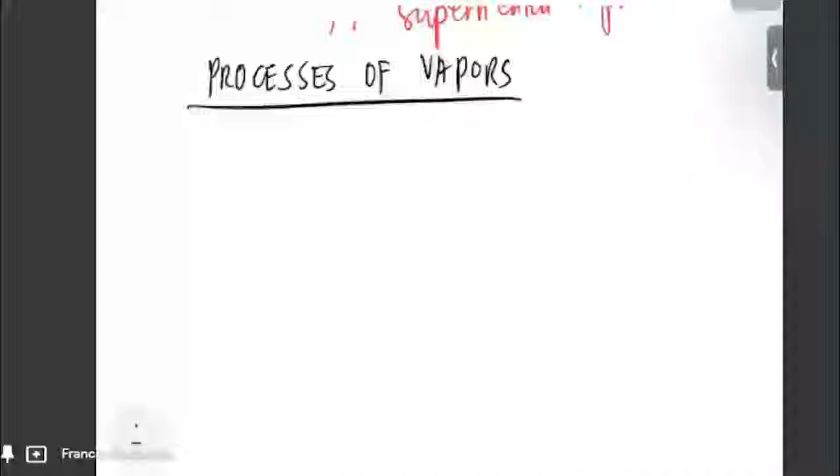We have vapors and ideal gases, they are similar in different forms. So, your PV = mRT, you will always use it. Okay? The energy in and the energy out.

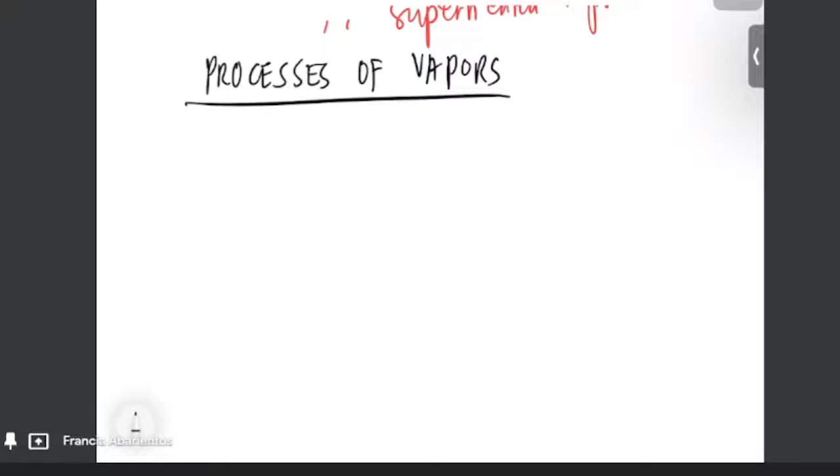Okay, so it says here, all of vapors and ideal gas have similarity in forms and in their processes, but all of the equations that are based on the characteristic equation of a perfect gas or on Joule's law are not generally applicable to vapors. But the general equation, so our energy in, energy out,

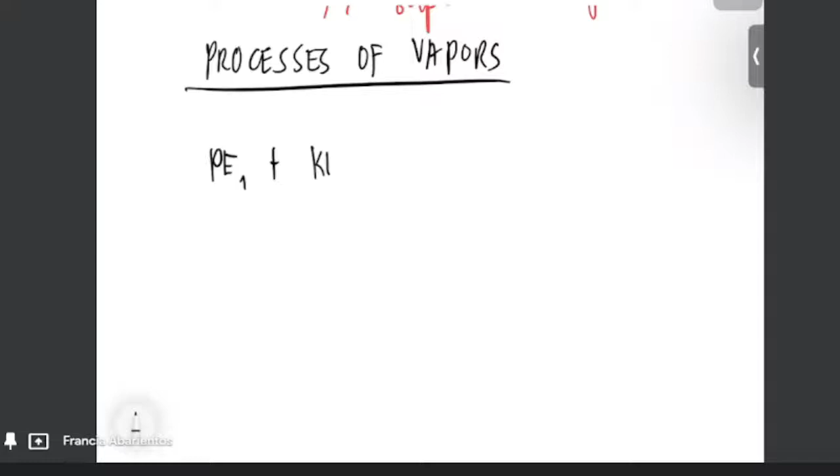We have the potential energy entering at point 1, kinetic energy entering at point 1, as well as the internal energy at point 1 and the flow work plus the heat added is equal to the potential energy at point 2, usually no more kinetic energy, we have now the internal energy and the flow work at point 2 and the non-flow work. Okay. Wait, here class, flow work at 1 and 2.

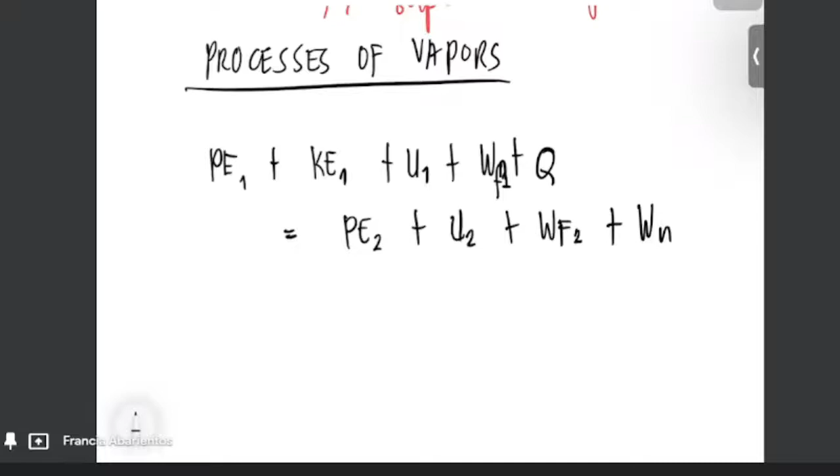Okay. So, the main equation, class, for processes of vapor: we use the simple energy equation. Usually our potential energy and kinetic energy are neglected, as well as the flow work at point 1 and the flow work at point 2. So, usually class, we have the simple energy equation. I won't derive it anymore, class. The derivation is there.

Okay. So, we have now the Q, we have the internal energy at point 2. Also class, the potential energy is neglected too. We have the internal energy plus the non-flow work. So, okay. There are limitations to this, class, concerning the substance, but it is applicable to the different processes of vapors as well as to gases.

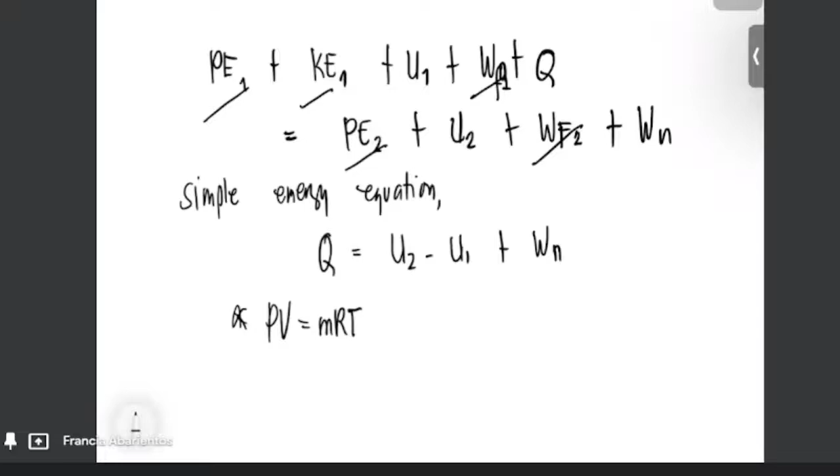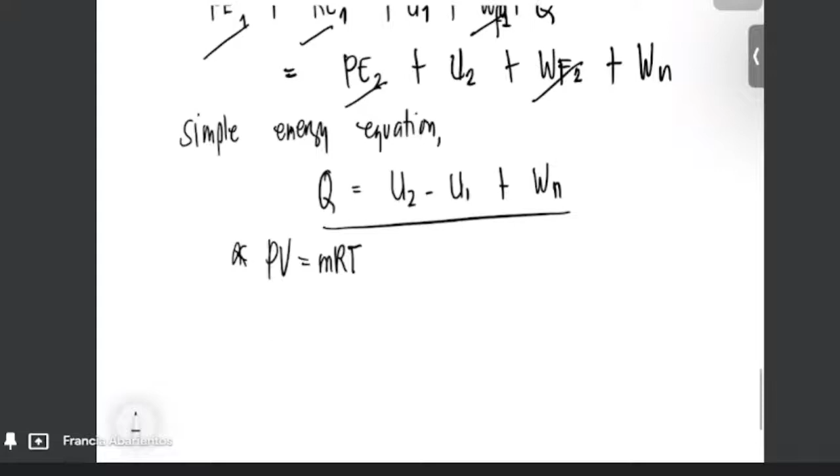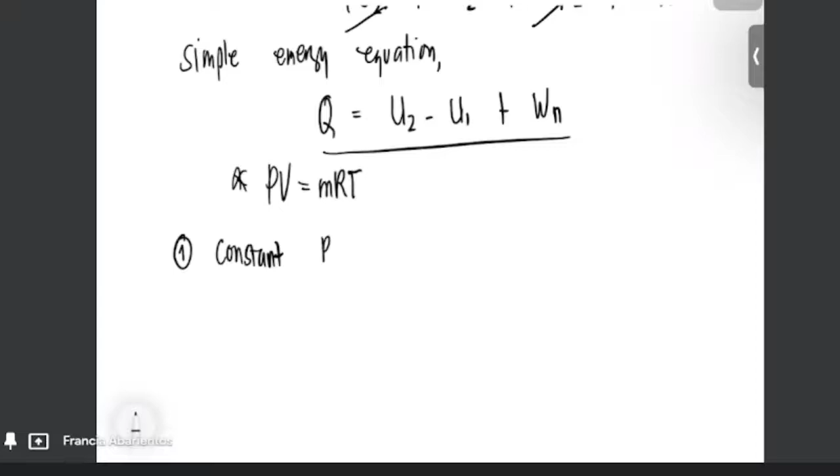Okay, so the first process is the constant pressure process. Okay, this is called constant pressure. What is it called, class? That is iso-what? Please chat it. Let's see if anyone read my module in Thermo 1. When it's a constant pressure process, class? Okay, so that is isobaric process.

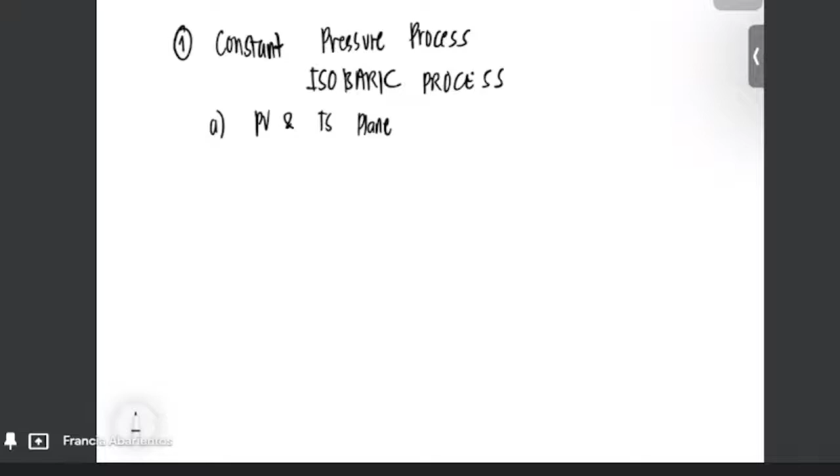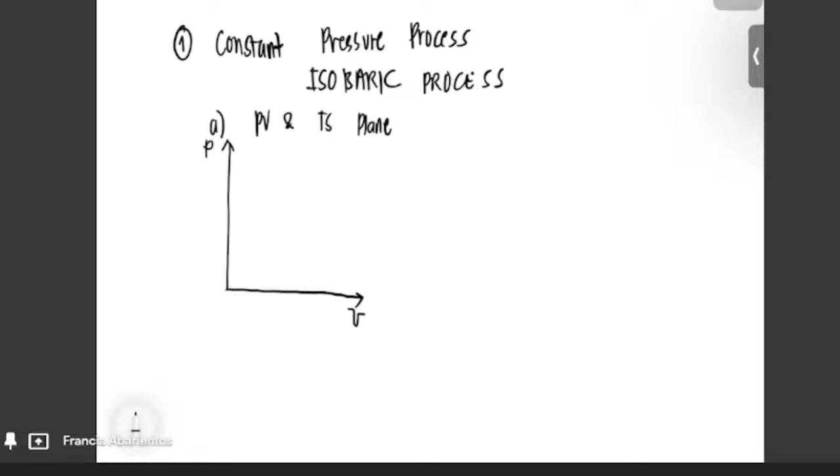That is correct. Okay. So, a constant pressure process, class, is called an isobaric process. So, in the isobaric process, class, I'll show you the PV and the TS diagram during the isobaric process. So, what does the process look like on the PV and TS diagram? Okay. So, we have the PV. This is the pressure-specific volume. So, it's like this, class.

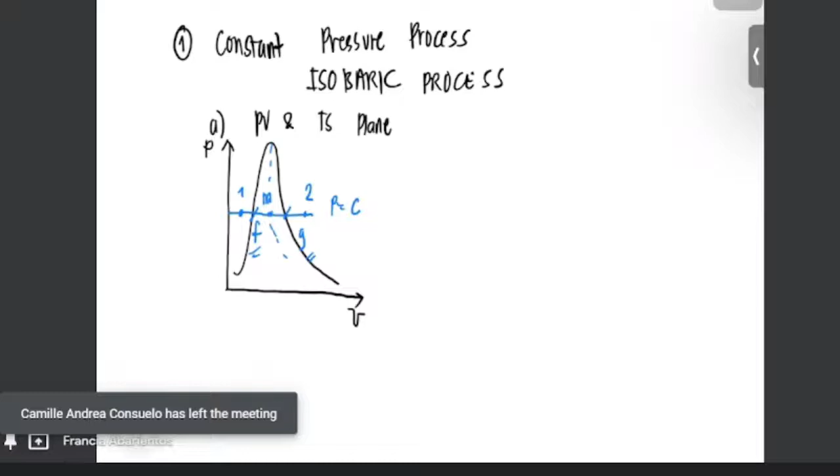When we say constant pressure, from the word itself, it means class, our P is a straight line. So, constant pressure, class, your P is equal to C, constant, for example from point 1 to point 2, this is now a constant pressure process. So, here class, this is F and this is G. This is the saturated liquid line and the saturated vapor line. So, in the middle, class, is our mixture, or what we call X. Our quality.

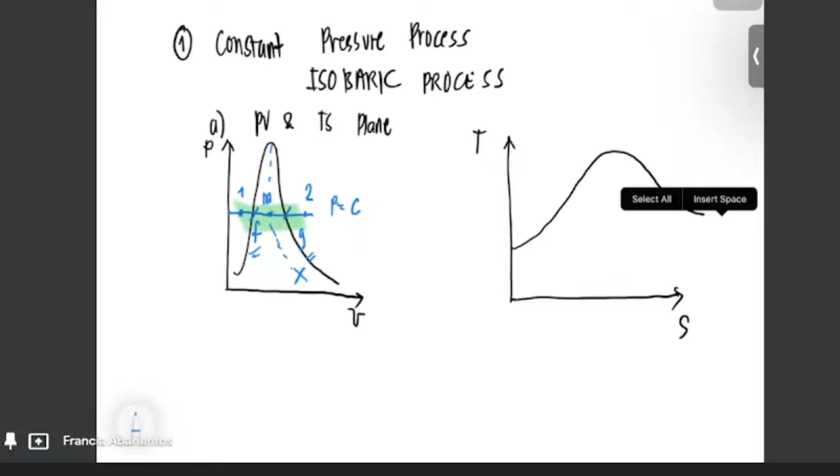From point 1, you go to point F, wherein that is the saturated liquid line. It's straight, class, when it gets here. And also, our M, mixture. And this is the saturated vapor line. And this is now point 2. For example, our pressure is 0.02 megapascal. So, when you draw it on the TS diagram, it will look like this. So, this is now your pressure line.

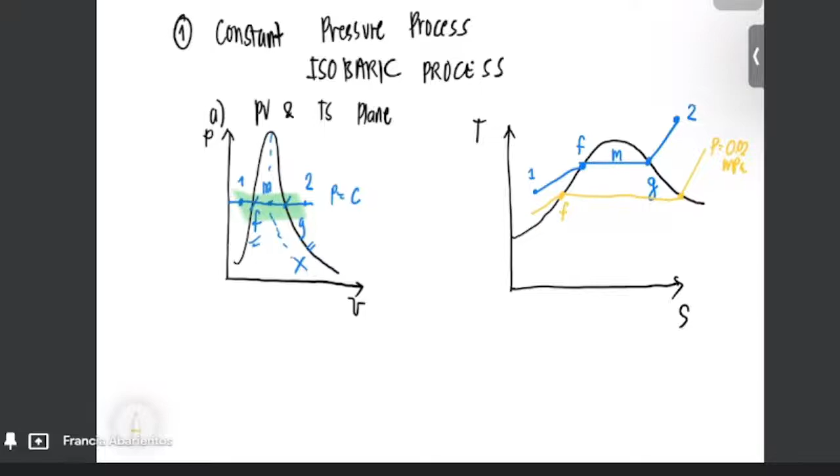Okay. So, kadalasan class sa PV diagram, paano natin nakukuha yung work as well as yung heat? Okay. Sa PV diagram class, ito. Ayan. Pakilakihan natin. Tandaan nyo to class ah. Sa PV diagram natin class, in a constant pressure, ayan.

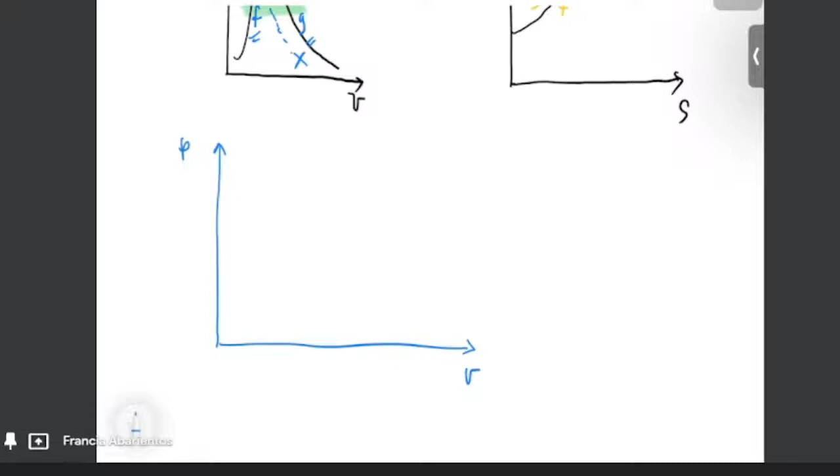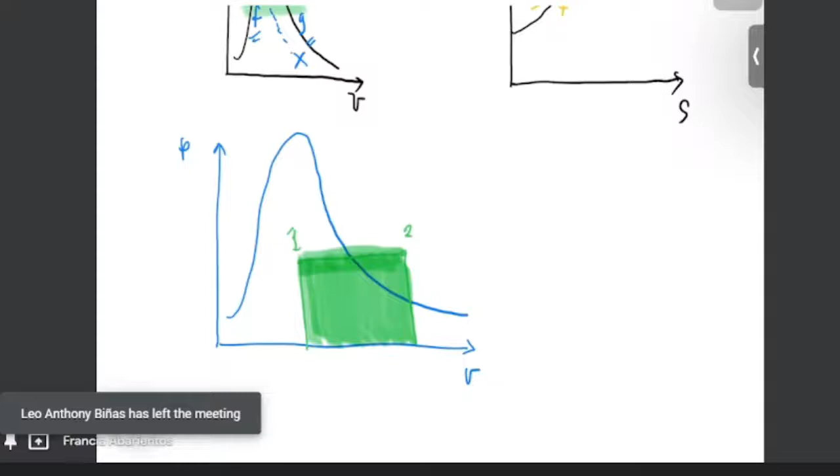In a constant pressure class, pag constant yung pressure niya from a wet mixture to that point, from point 1 to point 2, so makikita niyo to, this shaded portion. So, shade natin siya. Ayan. This one, the shaded portion, when it comes to PV diagram class, from point 1 to point 2, this shaded portion is called the, anong tawag sa kanya?

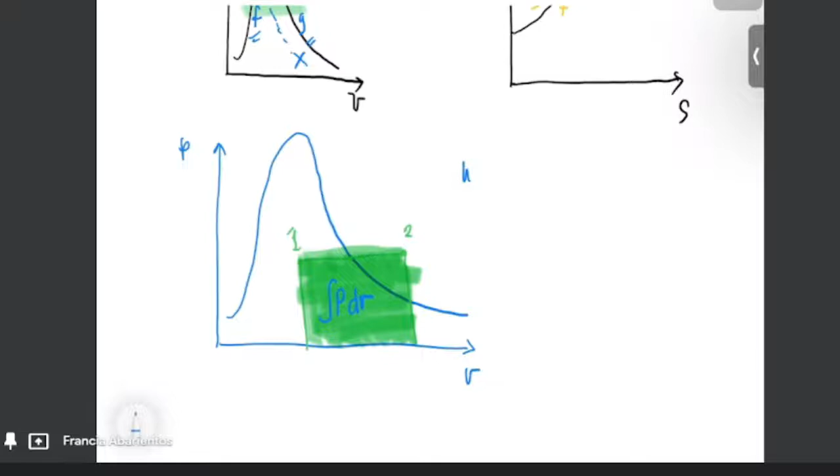This is now the integral of P dV. Bakit? Ibig sabihin, class, the work of the reversible non-flow constant pressure process. So, this is now your work of a reversible non-flow, class. Non-flow constant pressure process. Ayan, para maintindihan niya. So, in short, this is the work of the non-flow reversible process.

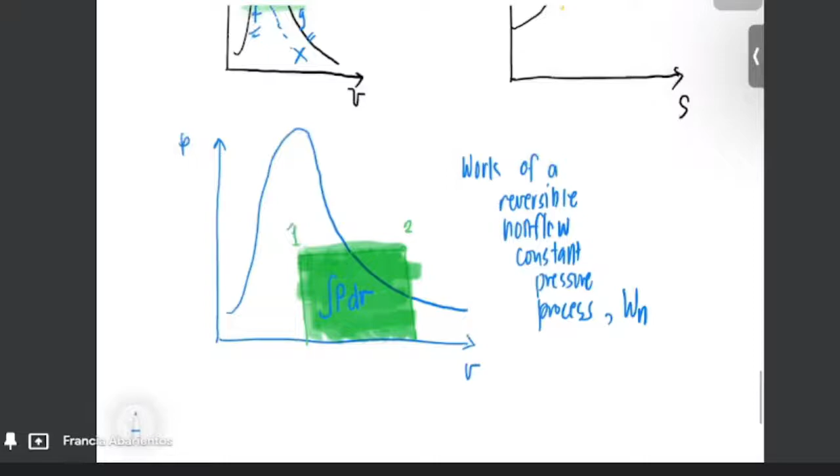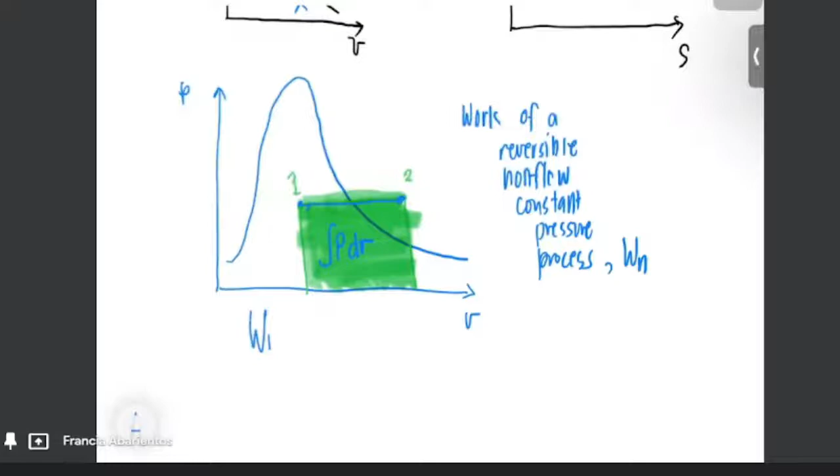Okay. Ibig sabihin, class, in a constant, ulitin ko, in a constant pressure process or the isobaric process, this shaded portion now is the work of the non-flow, which is equal to the integral of P dV. Di ba class, pag nagkukuha tayo ng strip, di ba? In your integral calculus. Pag kumuha ka dyan ng isang strip, okay?

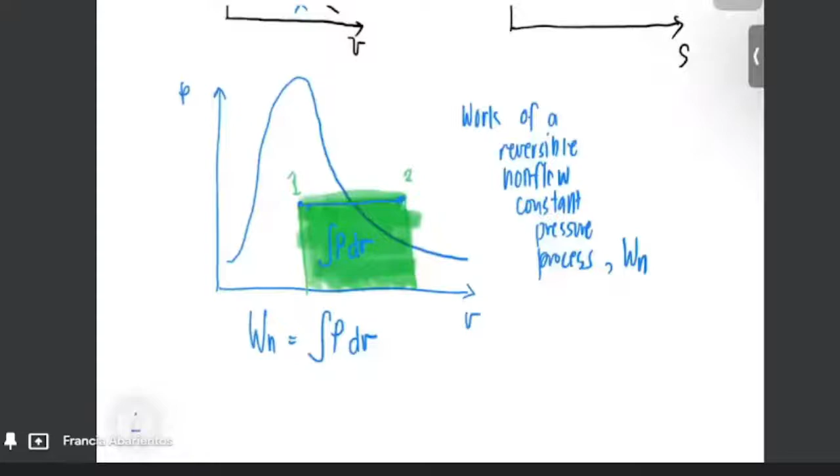So, if the pressure is constant, given sa atin yung pressure natin constant, automatically lalabas mo siya P dV. Diba? So, we have now the formula in the work of the non-flow at a constant pressure. So, pressure from point 1 to 2, kasi we have given points 1 to 2. So, P times V2 minus V1. This is now your work of the non-flow in a constant pressure.

How about for a steady flow process? Pag steady class, babalikan natin yung energy in, energy out natin. So, this is your work. Letter B natin. Ito yung letter A natin, the PV and the TS. Letter B, work of the non-flow. For the steady flow process, iba din class yung work doon.

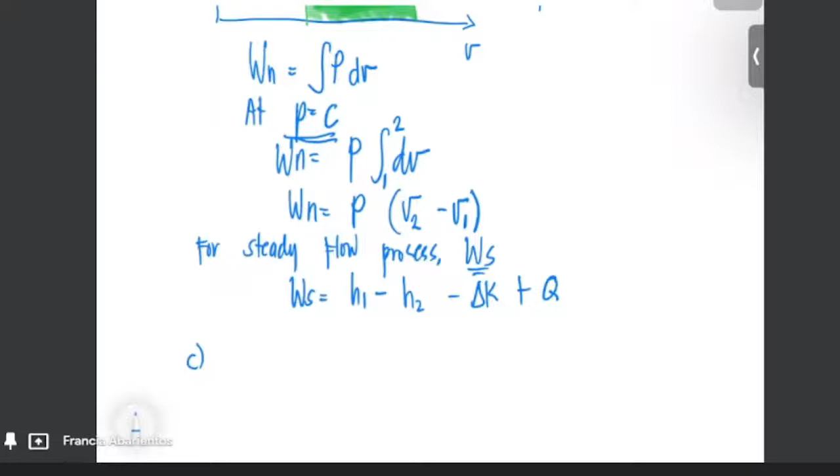So, balikan natin yung general equation sa thermo. We have the work of the steady. So, maiiwan sa atin is the enthalpy, H1 minus H2, minus the change in kinetic energy, plus the Q. So, depende na lang to class sa ating general equation. Mamaya, magsasolve tayo. And also, the transferred heat. Sige class, pakita ko lang sa inyo. Or the Q. Sa PV diagram class, work yung nakukuha natin.

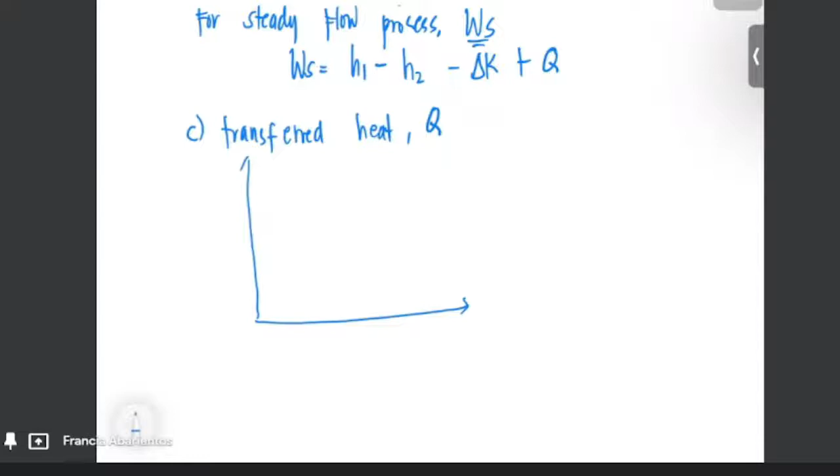But here, in TS diagram. So, this is now your TS diagram. Balikan nyo yung TS diagram natin. Okay. Tabingi na yung madrawing ni ma'am. Okay, so we have now the point. Red yung gamitin natin para mas matingkad.

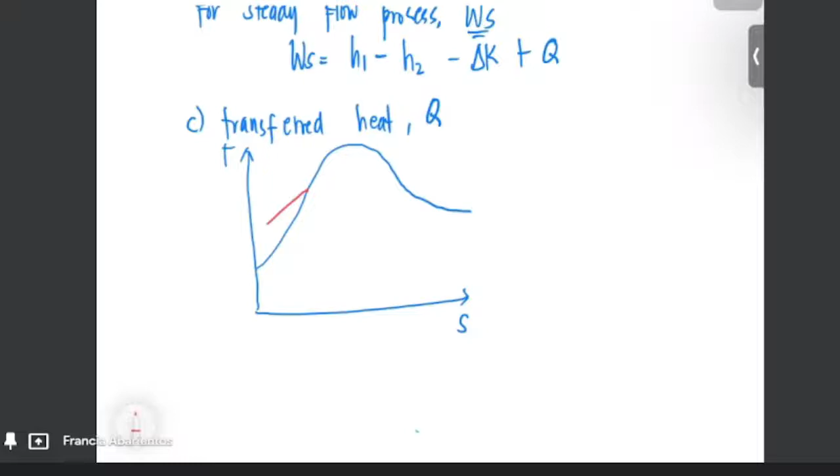And we have here, this is the constant pressure line. Ganito baga class, diba? From point 1 to point 2, for example. Yung shaded portion class dito. Ayan. So, this is now your shaded portion. Pag sa TS class, this is the heat. Yung shaded portion natin is the heat.

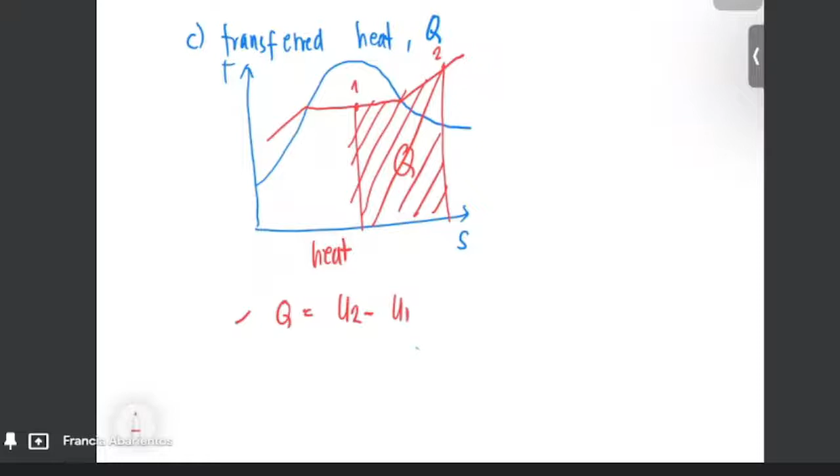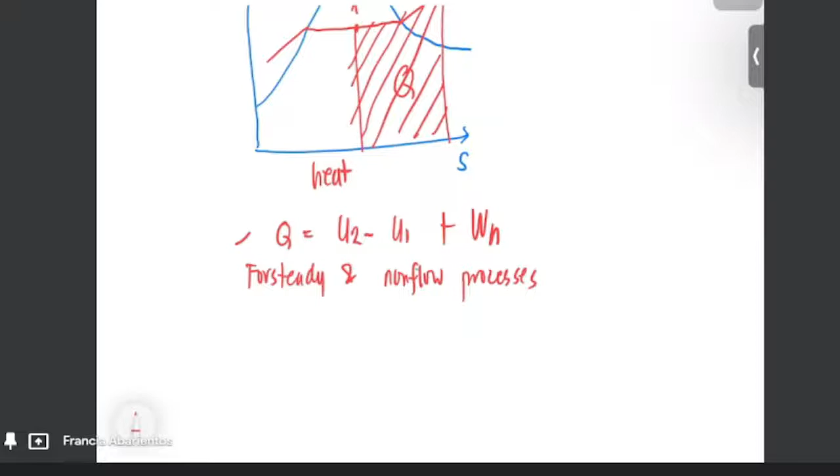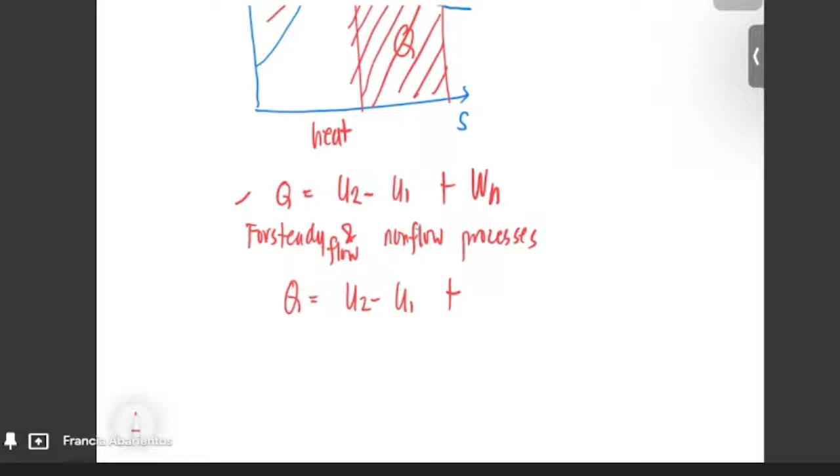Okay. So, from the simple energy equation kanina natin, we have this general equation: internal energy plus the work of the non-flow. So, eto na class yung formula natin. So, for steady flow and non-flow processes, balikan natin: Q equals U2 minus U1, plus yung work natin class sa non-flow in a constant pressure, balikan nyo to. This one. Ito class, oh.

So, yung work non-flow natin kanina, pressure times the specific volume or the volume at point 1. So, we can use also here, since dalawa yung given points natin, pressure 2, kasi constant naman lang siya. We can use this formula: P2V2 minus P1V1. Okay. So, general equation class. Pag binalikan nyo sa thermodynamics, we all know that this is the general formula.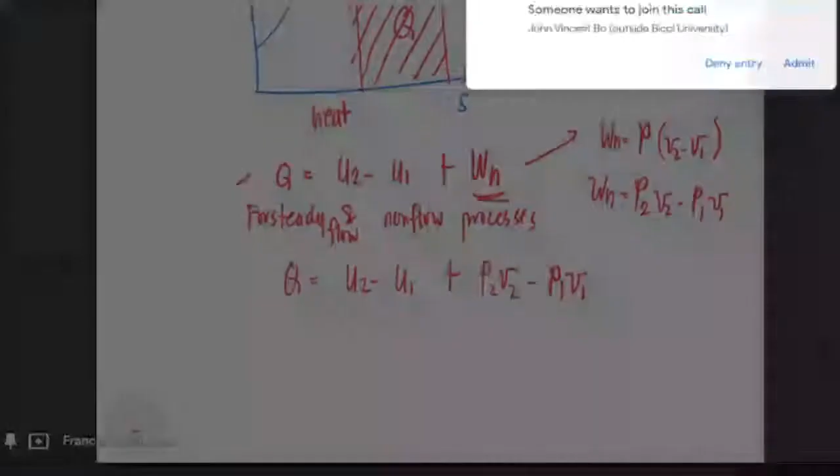Okay, wait, class, may nagpapa-admit. Okay.

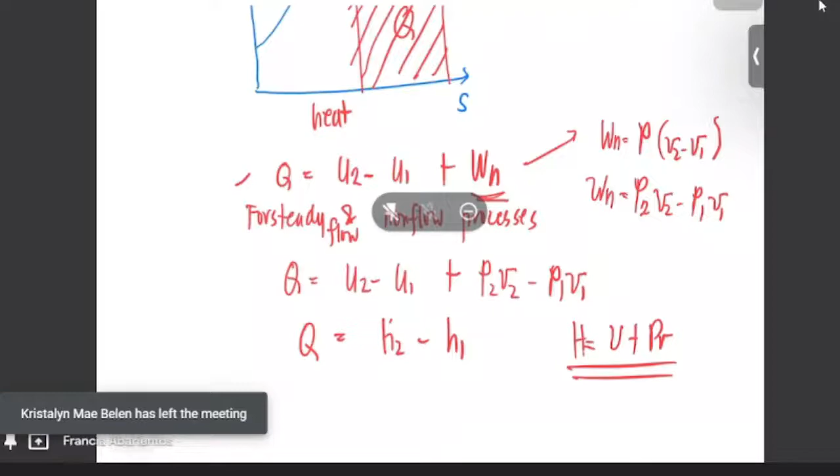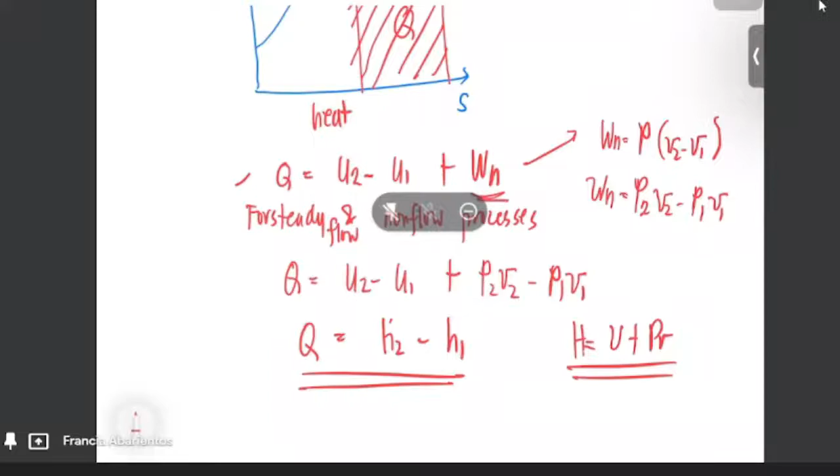So, we have now the general equation. Yung enthalpy, balikan niyo ko sa thermo, thermo 1 na hindi ko naturo. Q is equal to H2 minus H1. Kasi ito class, we have general equation: H is equal to U plus PV. Balikan nyo to. So, this is now your transferred heat when it comes to the constant pressure processes. If the change in a specific internal energy is desired, we can use the relation.

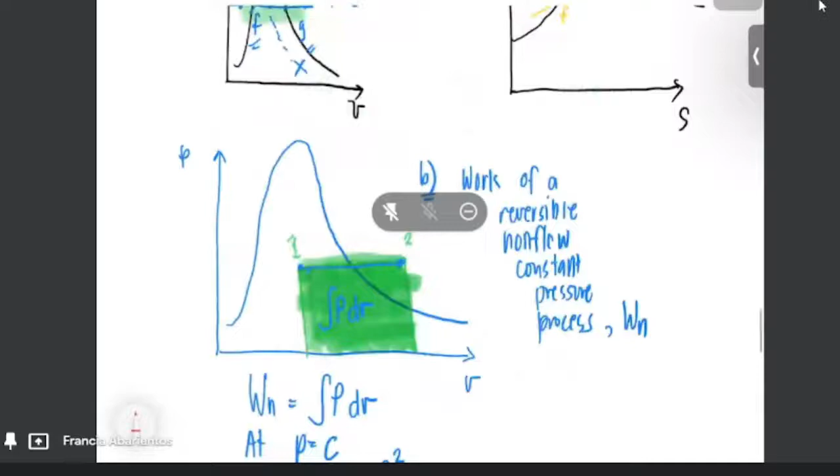Pwede naman class gamitin natin to, that the U2 minus U1 is equal to (H2 minus P2V2) minus (H1 minus P1V1). Okay, so ito yung babalikan nyo class. Here, the H is equal to the U plus PV. Okay? So, yan class yung makikita natin. So, this is just an example of the constant pressure process, the isobaric process.

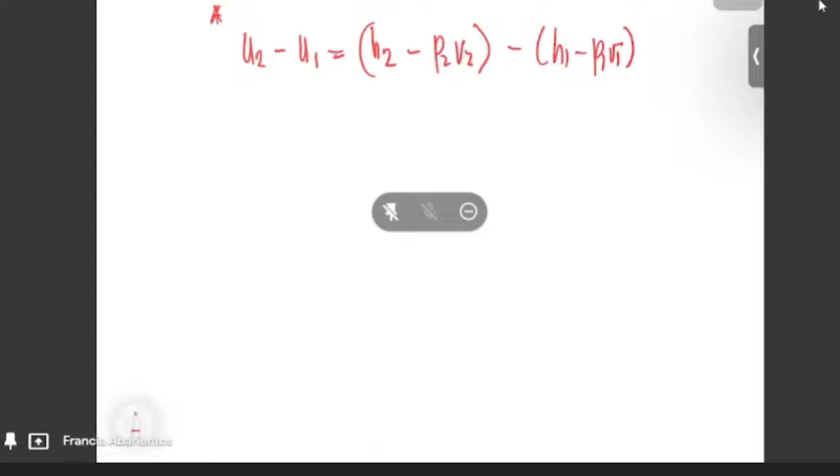Okay? So, ano yung example natin dito? Okay, so paano natin makukuha yung mga pressure processes? Sige, mahaba-haba to. Sige, let's try. Okay, example. Anong gusto nyo? Yeah, ito na. So example muna tayo sa constant pressure processes. So, sabi dito, number 1.

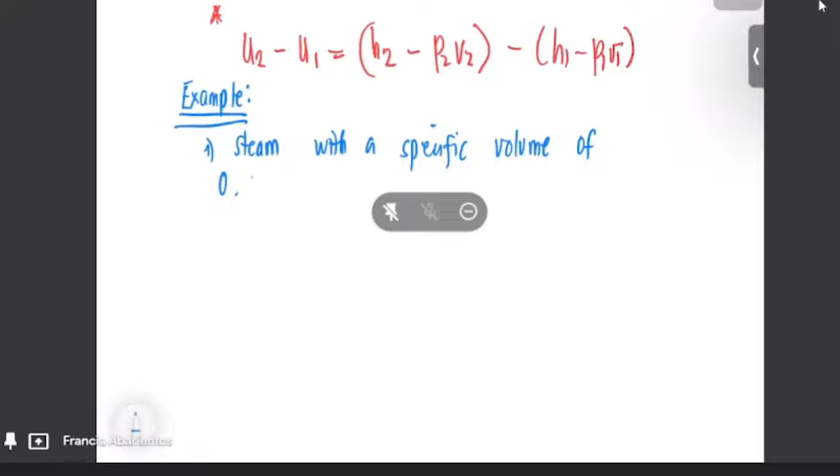Steam with a specific volume of 0.09596 cubic meter per kilogram undergoes a constant pressure process at 1.7 megapascal until the specific volume becomes, okay, madami-dami na class, 0.13796 cubic meter per kilogram.

So, what are: letter A, the final temperature. Letter B, the change in internal energy, the work. Letter D, the change in entropy. And E, the transferred heat. Okay? So, ano yung solution natin? First class, we all know that this is a constant pressure and TS diagram. Pag ganito class, pag nakuha mo na, idodraw mo din yung PV and TS diagram plane kahit hindi ko sa question. Okay? At the end of the process.

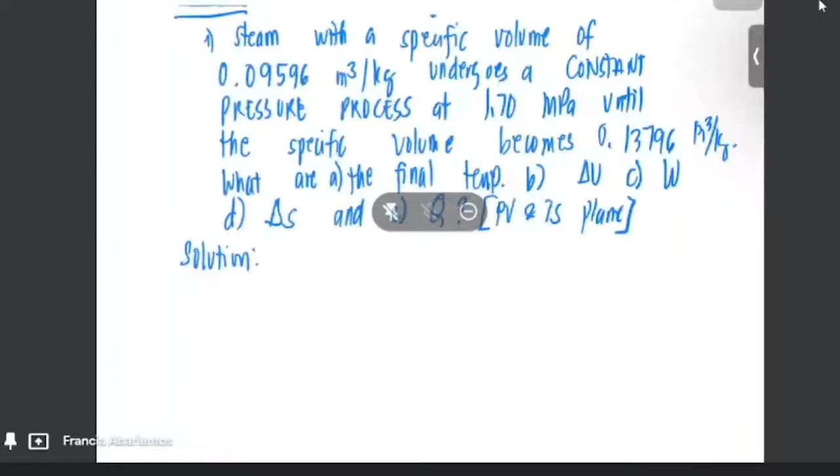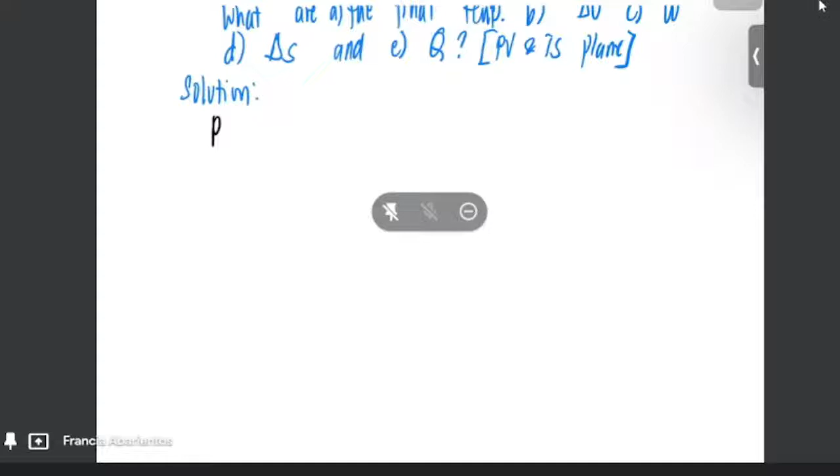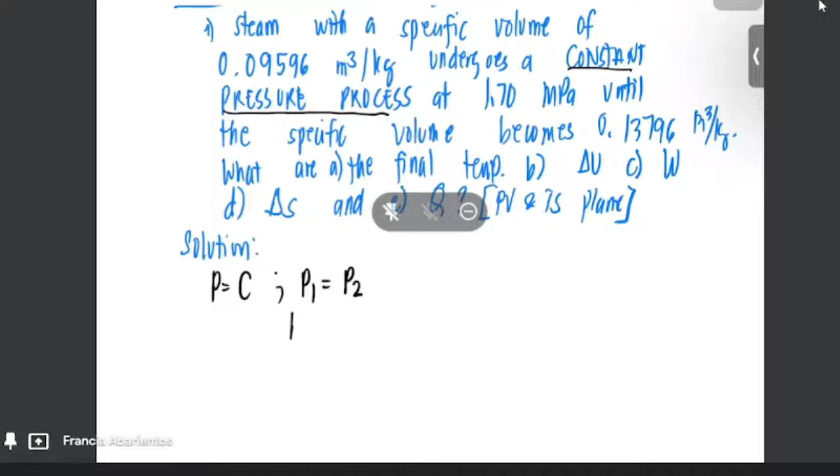Let's start using the steam table. Okay. So, ano yung given sa atin class? Black na yung gamitin. So, yung constant pressure natin is the pressure 1 is equal to pressure 2 kasi constant pressure. Yan yung tatandaan mo, constant pressure process. So, the pressure 1 is equal to 1.70 megapascal, also in pressure 2. Ang given sa atin yung specific volume at point 1 which is 0.09596 cubic meter per kilogram mass, and also yung specific volume at point 2, 0.13796 cubic meter per kilogram mass.

Class, masyado ba mabilis si ma'am? Hindi naman. Mabilis ba? Okay. Bibilisan ni ma'am kasi madami-daming kukunin. Sige kailangan ko yung cooperation nyo para madali tayo.

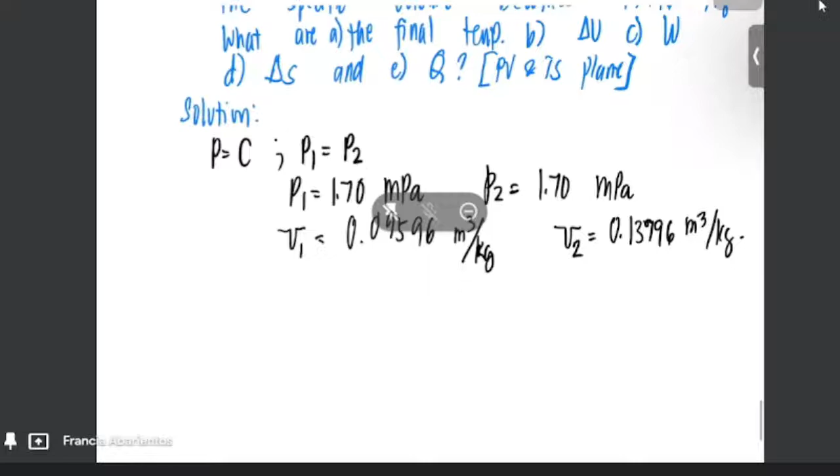Okay. So, punta tayo sa saturation pressure. Punta kayo doon, class. At pressure 1, which is 1.7 MPa. Anong table? Table 2, page 11, that is correct, 1.7. Okay, so what is the first thing we will need to evaluate? Ano class yung hahanapin muna natin? Given sa atin yung specific volume at 1, so make sure, this is the given.

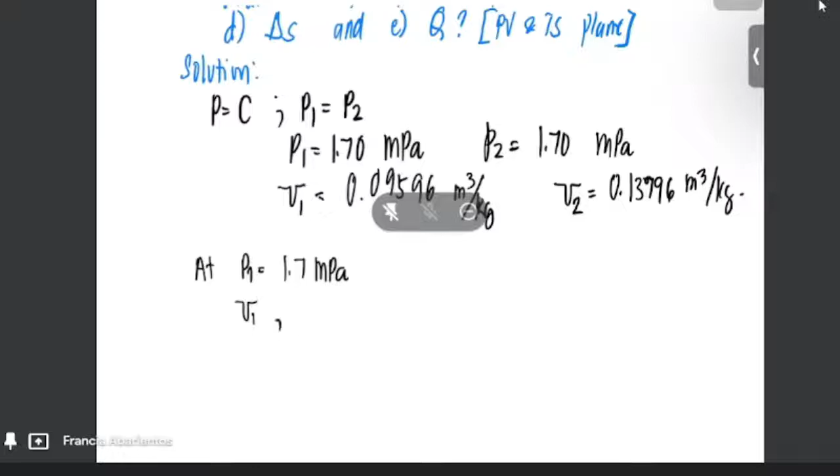Okay, class, we have now the specific volume. So ito class yung sinasabi ko na specific volume given. Kumpletohin nyo. So makikita nyo sa table 2, page 11, para mas maintindihan ng ibang classmates natin. We have the specific volume, the saturated: 1.1634 times 10 to the negative 3 cubic meter per kilogram. Tama ba si ma'am? Ay, VF to class. Pasensya class, naduling si ma'am. This is the VF.

And yung VG natin, the saturated vapor is, ilan class? Nag-chat na ba kayo? VF po, ma'am. Thank you, class. So, VG class, we have 116.73 times 10 to the negative 3 cubic meter per kilogram. Pag kinonvert natin, magiging 0.11673 cubic meter per kilogram mass. So, yung given sa atin is 0.09596 cubic meter per kilogram mass.

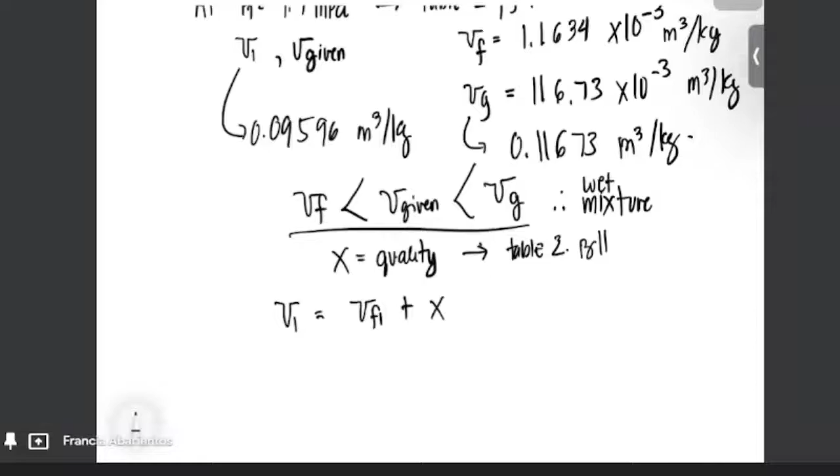Ang given sa atin is the specific volume. So, ano yung unang gagawin natin? Balikan mo. Yung specific volume at 1 is equal to VF plus X VFG at 1. Specific volume natin, sa steam table mo yun class makukuha, at 1 minus VF at 1.

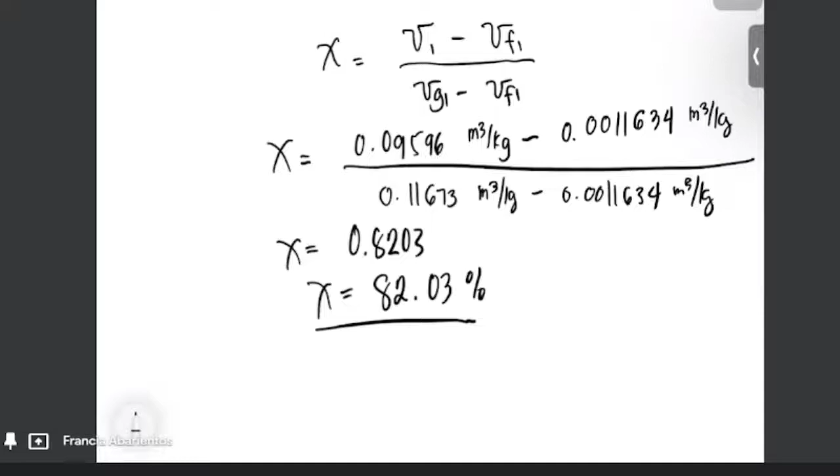Madaming pinapahanap sa atin. The internal energy. We need also the enthalpy, the entropy, ayan, lahat pala kukunin natin class. Okay, first, what is the next in the table, in the steam table? The internal energy at point 1. So, how can we use that? Internal energy at point 1. So, U1 is equal to UF at point 1 plus the quality times the UFG at point 1. Okay? Finding the internal energy at point 1.

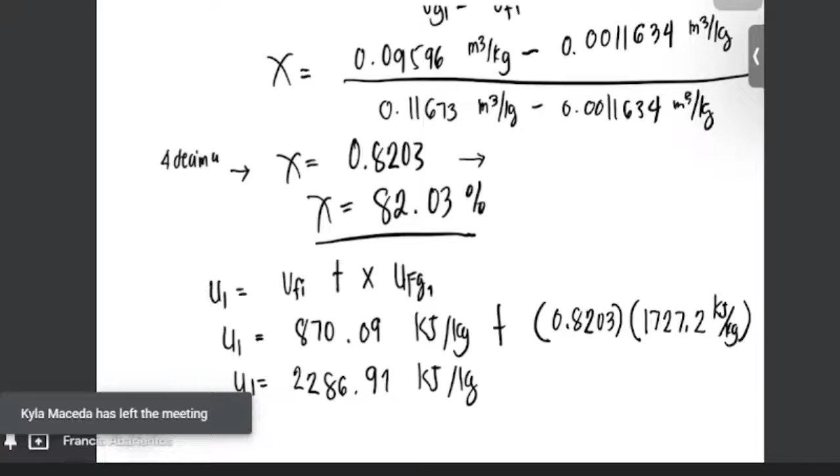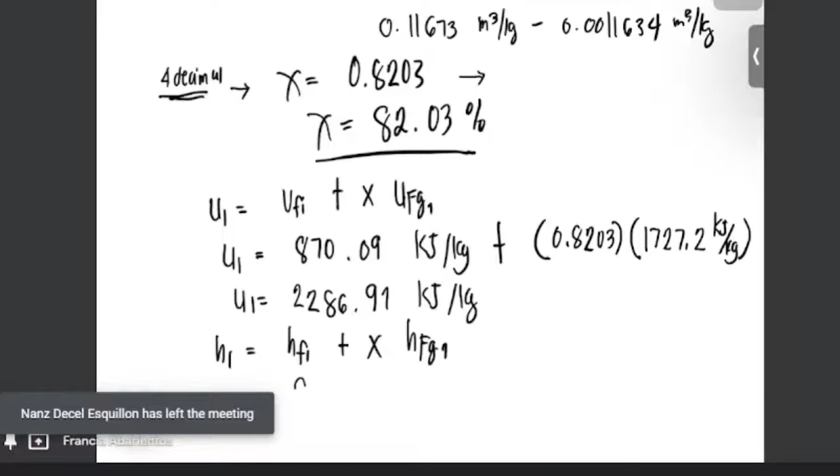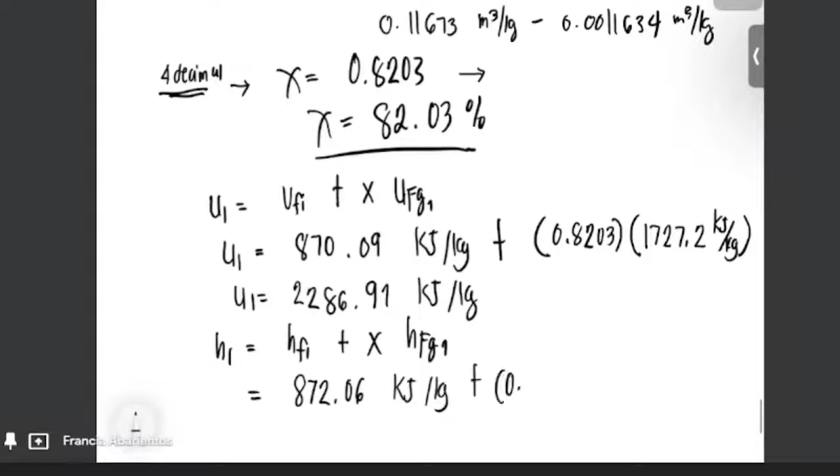We will find the enthalpy. Enthalpy, class. Enthalpy at point 1. Use this. At point 1 and the quality, HFG at point 1. Same table, we have the HF, 872.06, naduduling ba si ma'am? Hindi man. Kilojoule per kilogram plus 0.8203 times HFG, or the latent heat of evaporation, 1923.6 kilojoule per kilogram. So this is now your H1. This is your H1.

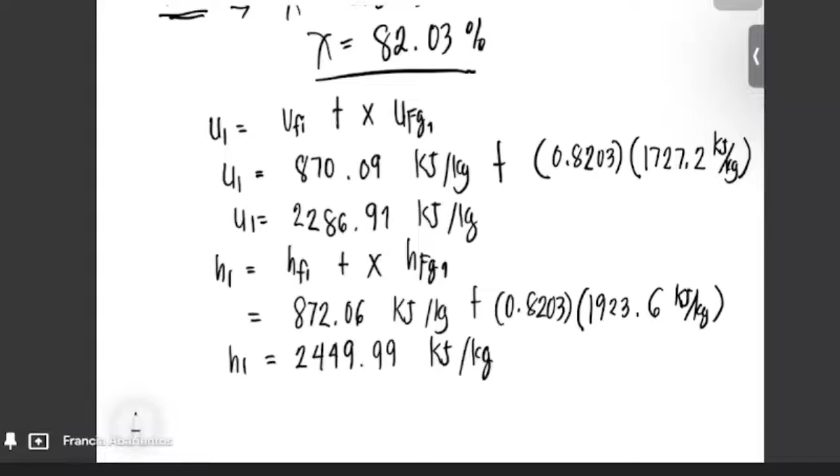872 plus 0.8203 times 1923.6. What is your answer? Okay. We have 2449.99 kilojoule per kilogram. Okay. So, lahat ng andito sa steam table, hahanapan natin, class, ha? That is the first, the U1, the H1. Next, proceed tayo sa S1.

H1, tapos na. Entropy. At point 1, we have the saturated liquid line, the entropy at the liquid line at point 1 plus the quality times the latent heat of evaporation, SFG at point 1. We have now 2.3718. Ano yung unit ng entropy? Kilojoule per kilogram Kelvin, plus yung quality natin na 0.8203 times SFG, 4.0282 kilojoule per kilogram Kelvin. So this is now your entropy at point 1. Huwag kakalimutan yung unit.

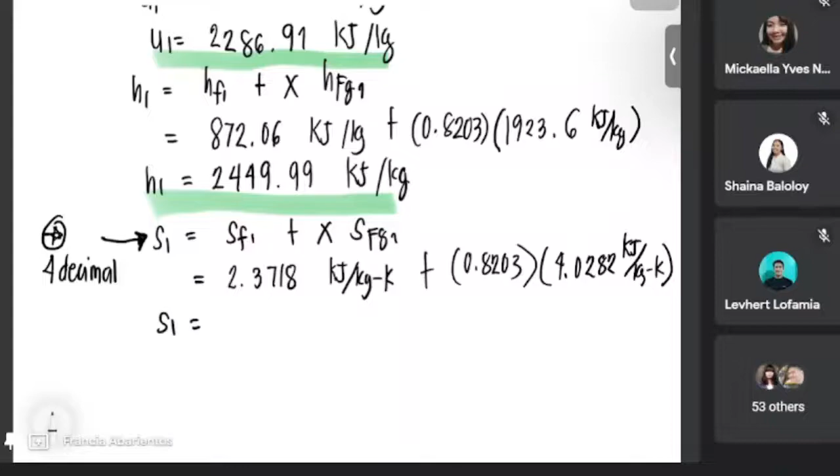Tingnan ko nga sa chat. Ayan, 5 point. Okay. Thank you, class. Okay? Naintindihan yung ruling natin? 5.6761 kilojoule per kilogram Kelvin. So that is now your entropy at point 1.

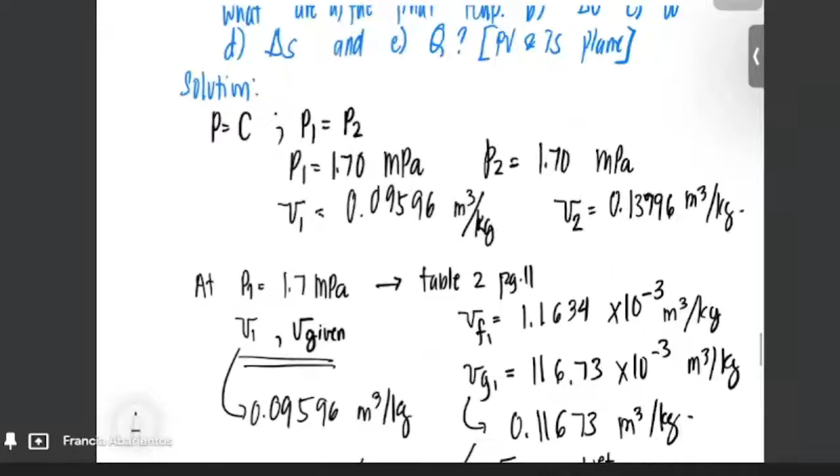Okay. So, given sa atin sa point 2 is this one, may specific volume na. Okay, at point 2. At point 2, yung pressure natin constant, ilan? 1.7 megapascal. But sabi sa problem, it becomes until that specific volume at point 2 becomes 0.13796 cubic meter per kilogram.

Okay, balik tayo dito sa steam table, sa table 2, page 11. Tingnan nyo, class. Sa page 11, the specific volume kanina nakita natin is 116.73 times 10 to the negative 3 cubic meter per kilogram, equal to 0.11673. Okay? Makikita nyo, class, that the specific volume na given sa atin is greater than this.

Automatically, that is now a superheated vapor. Okay, mas malaki yung given sa atin kaysa sa saturated. Ibig sabihin, nag-exceed siya dito. Ibig sabihin, superheated vapor na siya.

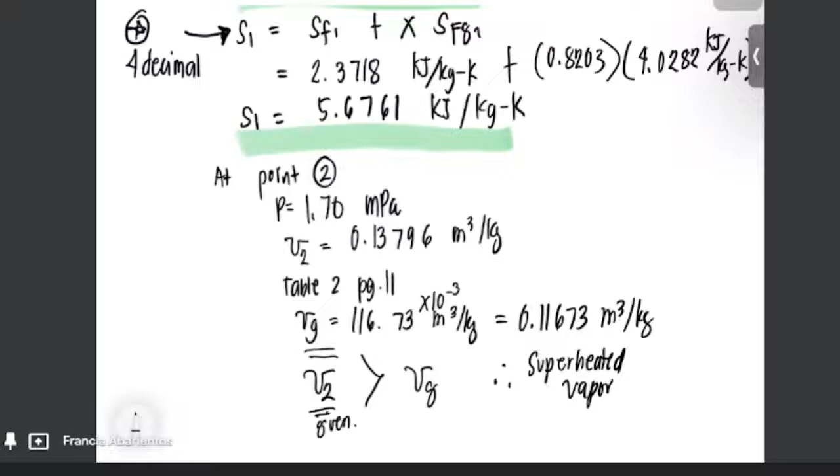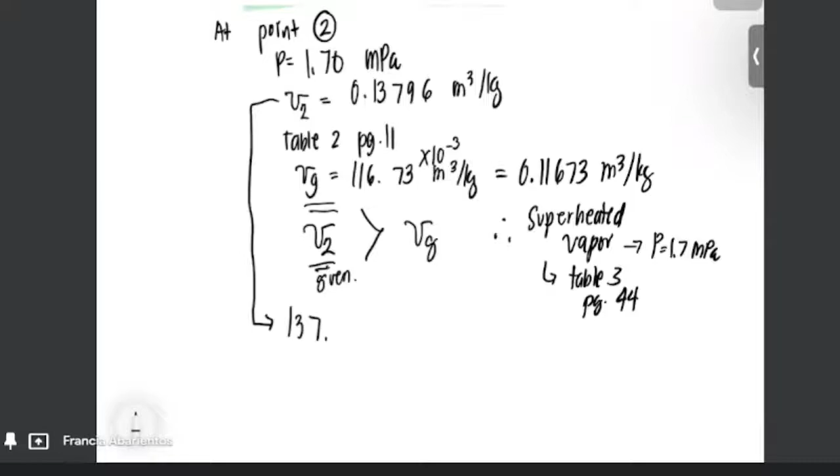Take note. We have now table 3. Pag nahanap mo na table 3, page 44. Ang guide mo is si pressure at 1.7 MPa. O, paano na? Ano na yung gagawin mo? Yun lang yung given sa'yo is specific volume. Okay? Makikita mo dito sa steam table, sa table 3, yung mga values. When this one is converted into times 10 to the negative 3, this is 137.96 times 10 to the negative 3 cubic meter per kilogram mass.

Okay. Doon sa table 3, makikita nyo sa taas si 1.7 and yung times 10 to the negative 3. Hanapin nyo, class, values na nagfo-fall sa 137. Ang makukuha mo is doon sa table. Para makita nyo, class, ang magiging guide natin is si 137.96. Okay? Dito, sa table na to.

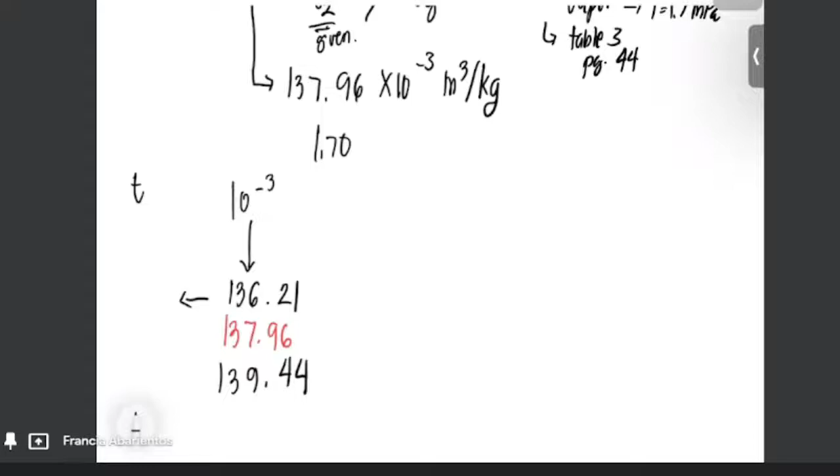So, makikita mo dun sa table is 136.21 and 139.44. And dito, this is now your saturation temperature. Kapantay ni 136, this is 260. And this one is 270. Okay. So, kukunin ko na to lahat, class, kasi mag-interpolate na tayo dito.

Also, we have internal energy: 2707.7, 2725.9. The H: 2939.3.

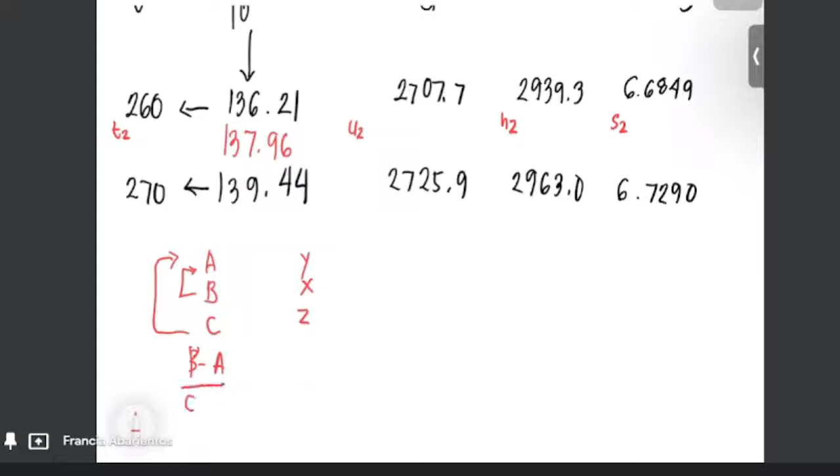You can now interpolate, class, using this. So, paano yung pag-interpolate natin? You can use this general formula: A, B, C, and Y, X, Z. B minus A over C minus A equals X minus Y over Z minus Y. First is sa right side kasi yung given sa atin is yung specific volume. We can use now the first equation sa interpolation.

0.13796 minus 0.13621 cubic meter, pakita pa rin, class, yung units, divided by 0.13944 minus 0.13621. So, this is now your basic. Dito sa kabila, T2 minus 260 over 270 minus 260, unit degree Celsius. Okay? So, class, what is now the temperature at point 2?

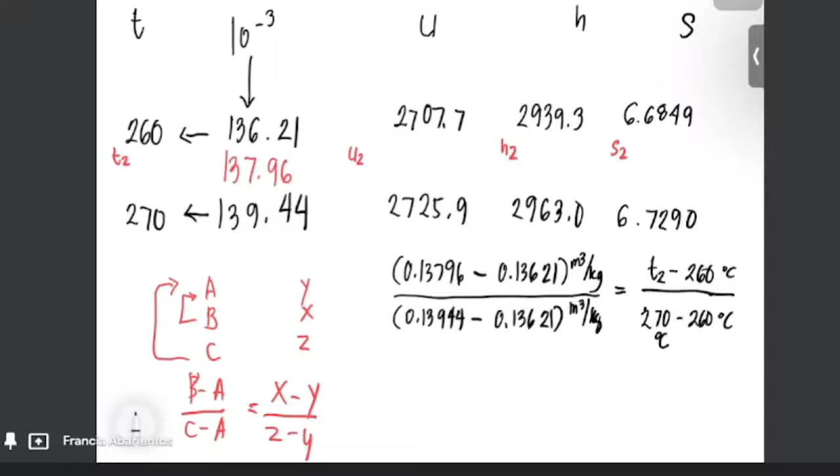Wow! Automatic? Sige nga, try din ni ma'am. 0.13796 minus 0.13621, divided by 0.13944 minus 0.13621. On the right side, shift store A. Okay.

Times 270 minus 260, 10. We have 265.42 degrees Celsius. Ayun, lahat na sinolve. Magaling naman. So, we have now the temperature at point 2. Lagay natin dito.

265.42. Okay, gawin niyo na. Solve also the internal energy. Sa internal energy, class, using the interpolation. Sige nga, ayan, nakastore na yung ano ko.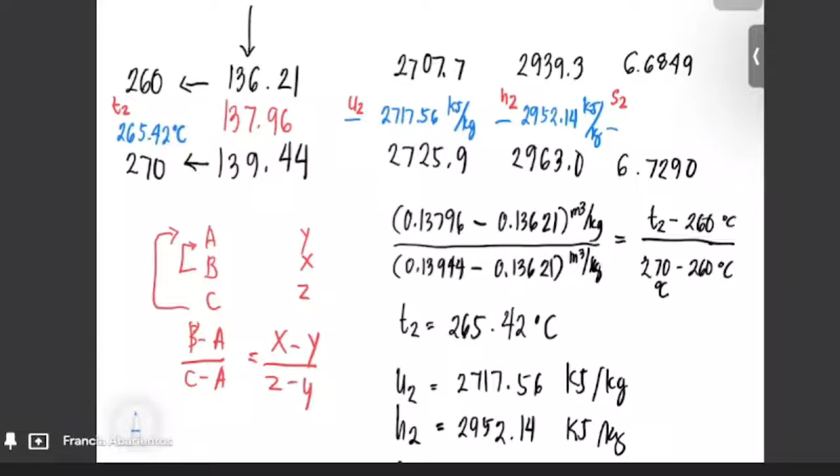Sige, pabilisan. Si Madam ngayon, aluyod mag-compute. Ayun, 6.68, 68.949. Ngayon, best friend niyo si steam table and si calculator niyo. 39. Okay, that is 6.7088 kilojoule per kilogram Kelvin. So we have now 6.7088 kilojoule per kilogram Kelvin.

Okay, wala pa tayo pass na solve sa mga pinapahanap. Kinuha lang natin yung state points, or the state points at 1 and the state points at 2. Okay, so ano yung tanong sa atin sa letter A?

What is the final temperature? So the final temperature, since we already solved that, is equal to temperature at point 2, which is 265.42 degrees Celsius. Okay, in letter B, find the change in internal energy.

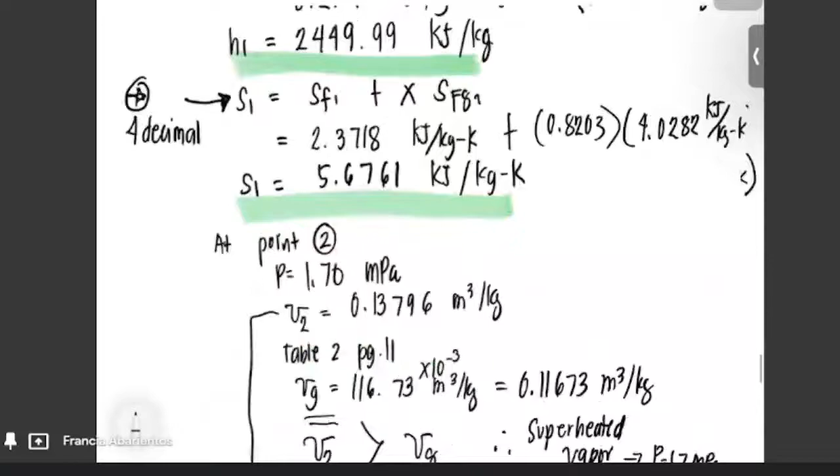So the change in internal energy is equal to U2 minus U1. U2 is 2717.56 kilojoule per kilogram minus U1. Balikan ni ma'am, ay hindi natin sinolve. Ayun, 2286.91, 22. Ayan, pakisolve nga. What is the change in internal energy?

Units, huwag kakalimutan yung units. Units. 2717.56 minus 2286.91. Okay, this is 430.65 kilojoule per kilogram. Yan, thank you, class.

Letter C. What is asked in letter C? The work. Okay, how do we compute for the work? How about the work, class? Since we are in a non-flow work, the work is equal to the constant pressure times the specific volume at point 2 minus the specific volume at point 1. Okay?

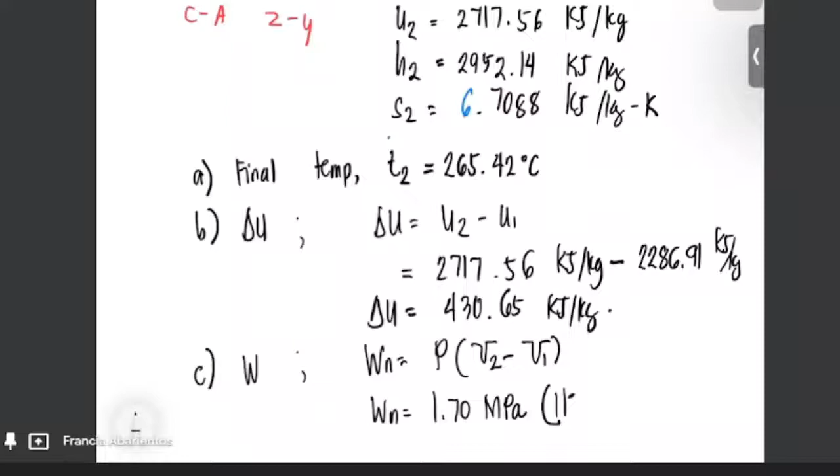1.7 megapascal. Take note of the word megapascal. Specific volume at point 2. 137. Oh wait. Okay, 137.96. Am I right? Even yan, class. Cubic meter per kilogram minus specific - given yung specific volume natin.

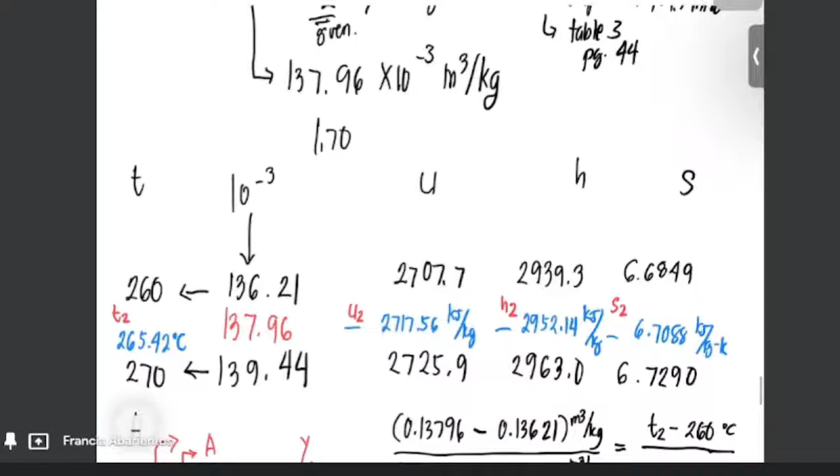This is 95.96, 95.96 times 10 to the negative 3 cubic meter per kilogram mass. So what is now your work? And the units, sige nga. Kadalasan dyan nagkakamali ang mga estudyante ko. Take note, megapascal and kilo.

Dapat ang pascal ba, class, that is in Newton per meter squared. So ang answer kadalasan is in Newton. 137.96 minus... Oh, bakit nag-arrive dyan si ma'am ng answer? You have to convert your megapascal into kilopascal. Para class, 1 megapascal is equal to 1,000 kilopascal. Okay, so makukuha mo na yan. Huwag kakalimutan yung times 10 to the negative 3. Na decimal yon. Okay?

That is letter C. How about in letter D? Constant pressure lang tayo, class, ngayon. Letter D, what is the change in entropy? Entropy. So we have the change in S, S2 minus S1. The entropy at point 2.

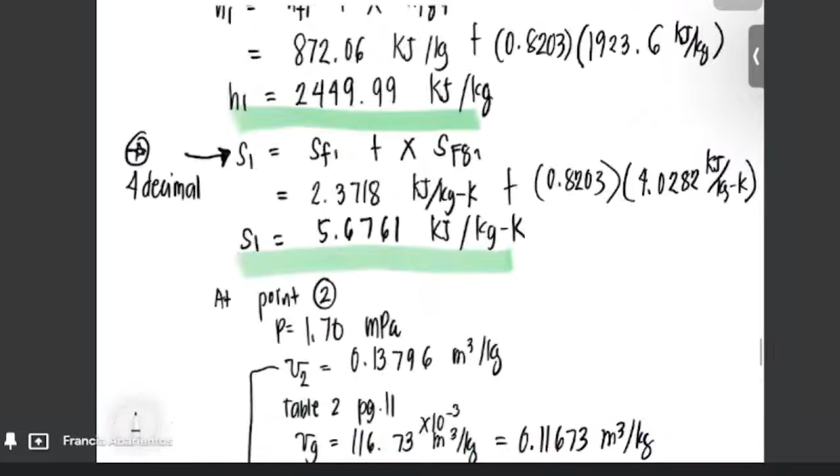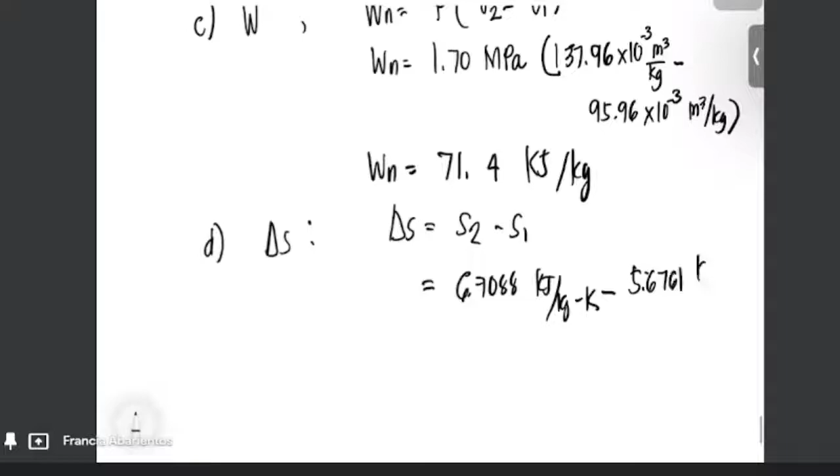Ayan, 6.7088 kilojoule per kilogram Kelvin. And this, the entropy at point 1, 5.67. Tama ba ako? 67, 61. Ayan, oh compute for the change in entropy.

Ayun, may answer na sila. 6.7088 minus 5.6761. Okay, this is 1.0327 kilojoule per kilogram Kelvin. Okay?

Intindihan ba, class? And letter E, last but not the least, we will find now the transferred heat wherein sa constant pressure. Tandaan niyo to, class, ha? The Q can be used as the enthalpy at point 2 and the enthalpy at point 1. Okay?

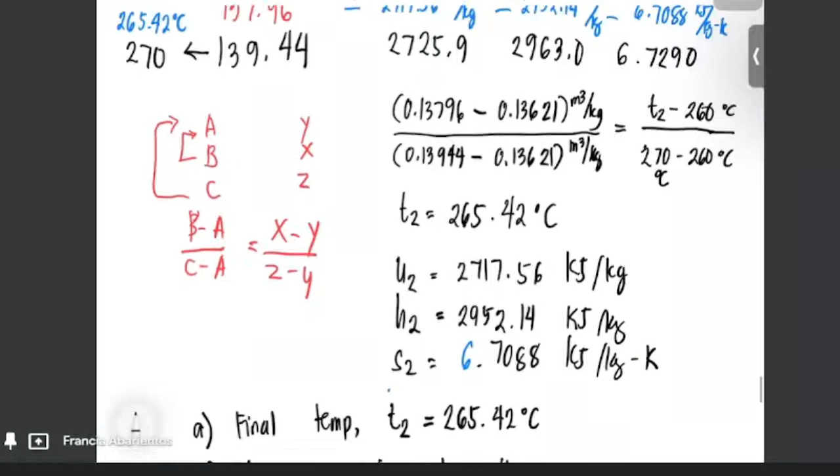Take note of that. We have now here the Q. So, H2. Ano, saan yung H2? 2952.14. Don't forget the unit, minus H1. Ayun, 2449.99 kilojoule per kilogram. So we have now the transferred heat.

Ilan? 2952.14 minus 2449.99. Okay, so we have now the transfer heat, 502.15 kilojoule per kilogram.

Okay class, may question pa ba sa ating Mollier chart and the first process of vapor, wherein that is now the constant pressure? Okay. Naintindihan ba, class? Baka hindi niyo naintindihan. Okay, class, naintindihan po ba?

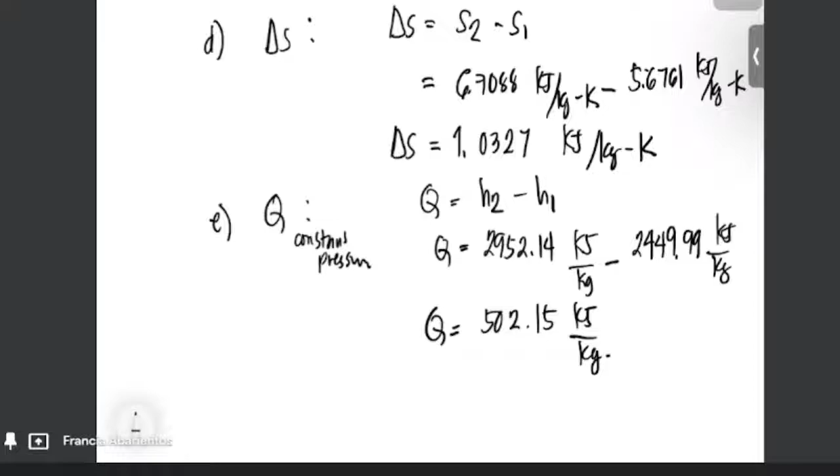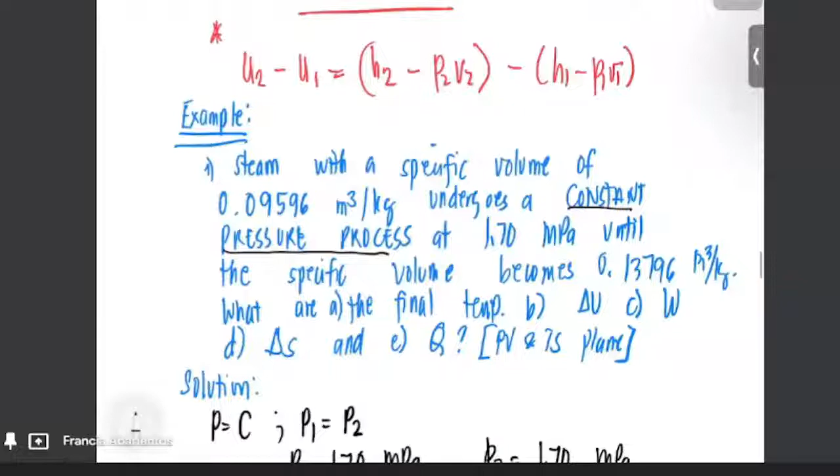Yan. Wala na po bang question, class? So ganun po class sa constant pressure. Isa pa lang po to class. This is the constant pressure. Okay? Constant pressure process. Okay? So if you don't have any question, then PM na lang si ma'am.